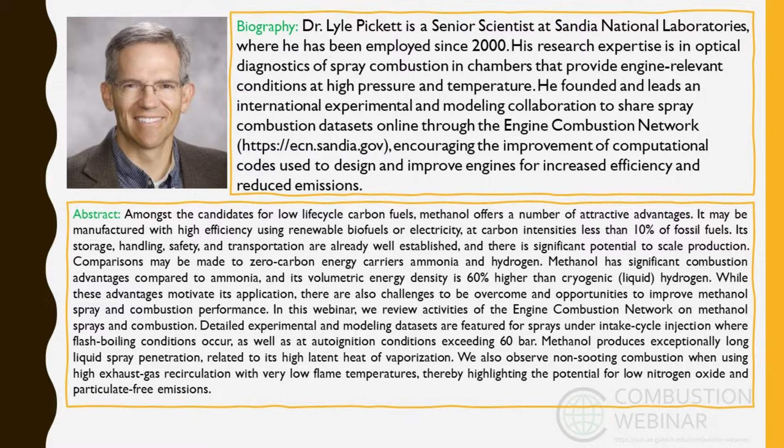Which I've entitled Renewable Methanol Spray Combustion. And while I'm the presenter for this research, I'm really drawing on the work of a large number of people. Many of these people have participated very actively in the Engine Combustion Network. You may be familiar with our workshop. We hold monthly web meetings and in-person workshops. And several of the people listed here have been major contributors and organizers on the topic of methanol spray combustion. So I'm going to be sharing some experimental and modeling research at Sandia, but also from a larger community.

Calling out some of these people by name, Rafael Clemente is from Friedrich Alexander University in Erlangen, Germany, and did a research stay at Sandia and collected much of the data that you'll be seeing today. Paul Lien is at TU Darmstadt, is involved in CFD modeling and was a co-organizer with Rafael, I call him Rafa, on this methanol spray combustion topic. And Frederik Wiesmann is also involved in modeling from TU Vienna, was a major organizer for the combustion and compression ignition topic on methanol spray combustion. And Julien Manin was the PI and lead for the collection of data on compression ignition of methanol, and then many other participants at Sandia.

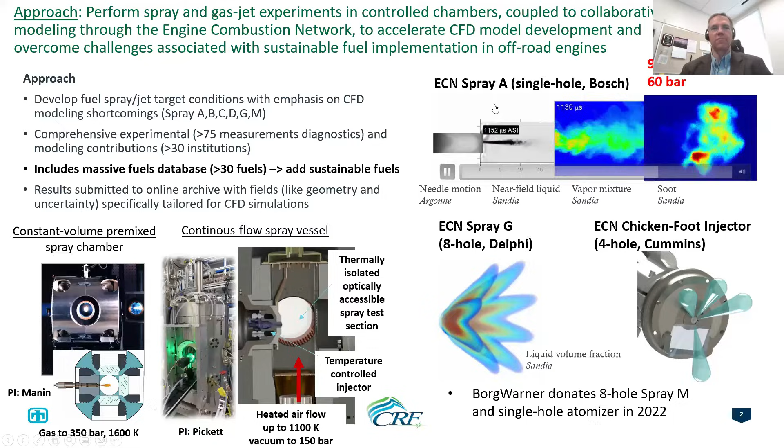And just speaking about the ECN and what I've described, what we're really trying to do is form a collaborative research group that can really benefit each other. And so we refer to ourselves as a peloton, as in cycling. And so the people that have gone on before and maybe have started some of this research, maybe have experimentally already investigated the topic, it really sets up a nice slipstream for others to follow, to join in quickly and to make an impact.

This can be experimentally or computationally. And as we met for our most recent workshop, which was held in September in Naples, Italy, this is the slide that we shared. And I want to thank Alessandro Montanaro at CNR STEMS for hosting us at this workshop. I'm listing myself and 2 other organizers from the ECN, Gilles Bruneaux and Raul Payri, who've joined in this effort.

And at this workshop, the Engine Combustion Network has changed, and we've chosen different topics for future research. All of these topics are focused on low life cycle carbon fuels. You can see the topic and then the leaders. So there is a very strong effort in hydrogen injection and combustion. There's methanol in the early direct injection application, and I mentioned those leads.

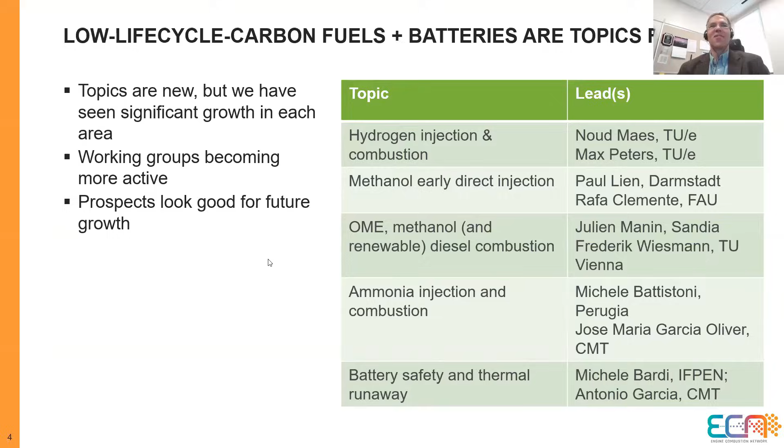And as we're in Naples, Italy, we could ask the question, well, how do these things fit together? Why are we doing this research together? And is there even an overlap? And many of you know that Naples, Italy is the birthplace of pizza. So we say there that yes, there is a reason that this activity can fit together like a pizza, where we're combining a perfect combination of ingredients, New World tomatoes with Old World cooked dough on a hot stone to create this kind of masterpiece.

And so we can go further with this analogy and say, all right, if you really want to start a debate with people with a lot of passion and opinion, you would raise the question, who makes the best pizza in the world? And in our research community, it seems like there are these topics, and I can make a very strong argument for research in each of these topics. I will make an argument about methanol research. But likewise, there's really strong reasons to look at hydrogen. There's strong reasons for batteries.

Their high conversion efficiency, the opportunity to power our electrical grid through renewables. Very, very strong reasons to look at these things. And there are pros and cons of each of those. So there's strong reasons to look at OME, DME, and renewable diesel as well. So speaking about the Engine Combustion Network, we view a lot of value in looking at all these things. And honestly, it's not clear to me that there is a clear winner. I think there's a strong reason to look at all these things together in some sort of combined pizza, if you will.

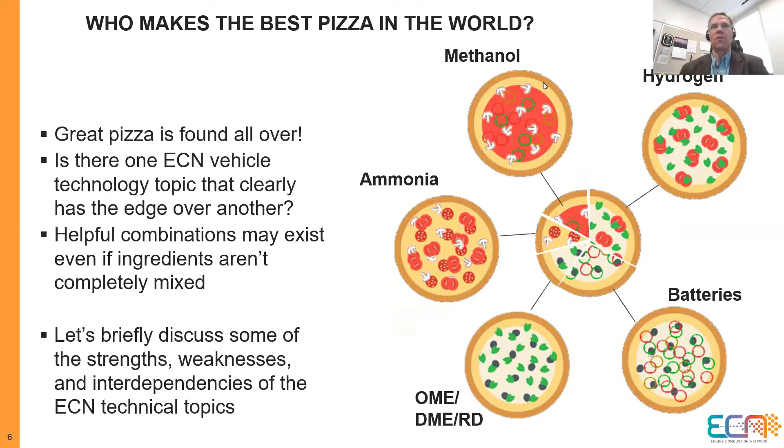So as I go into this, I think my view of the research motivations has changed because I think that many of the challenges are about production, making these fuels in high quantity, and it's not something that we can completely disconnect from how we plan to use it. So I'm just going to talk about those issues a little bit to motivate why methanol might be an interesting future. So one of the things to consider is the volumetric energy density.

And methanol is a carbon-containing fuel. So this graph is separating those fuels or batteries that do not contain carbon or do not emit carbon dioxide in the tailpipe. So it's quite interesting that even cryogenic hydrogen has a much lower energy density than does methanol, or than does any of the carbon-containing fuels. And of course, batteries are down here in terms of energy density, which is the significant challenge, especially for vehicles that are off-road or that are in remote places and so forth.

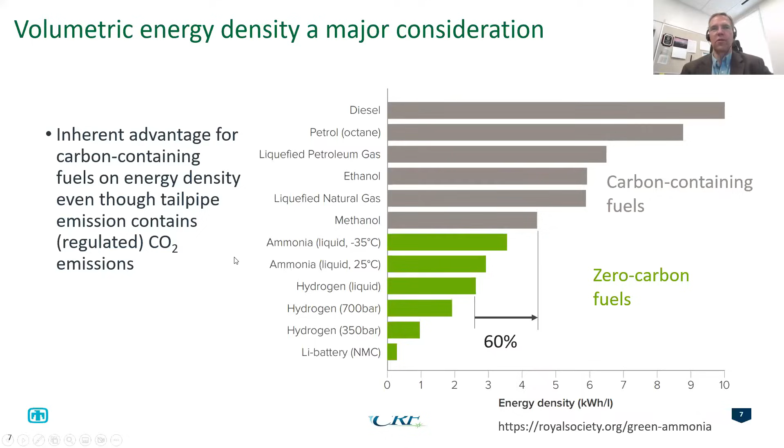So this is really a strong driver. I think we appreciate this and understand it, but stopping at a fuel that is very renewable on a life cycle basis, but that has high energy density is going to be a continual driver while this conversation goes on. And so I think it's important to consider an endpoint with respect to producing methanol and these other fuels: what is the potential in terms of efficiency, of course cost will matter, and in terms of things like land use and so forth. So green methanol production is enticing because it really can scale directly with our ability to produce renewable electricity.

And so I'm calling this slide favorable views on green methanol production because you will find different opinions in the literature. And so I'm listing the full sources here, but there are voices that say power to methanol efficiency can be 50 to 60%, even when using direct air capture for combining the hydrogen from electrolysis with the captured CO2. Even direct air capture, which is not a very efficient process, according to this study, could produce efficiencies that start to look pretty impressive.

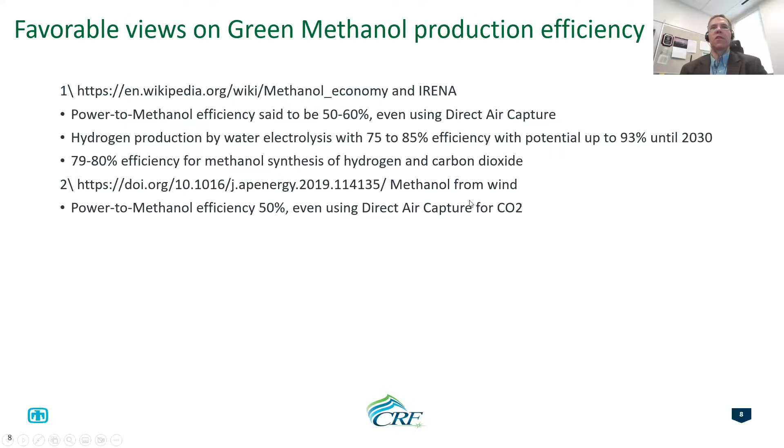Now, of course, we should compare that to other sources. So here's a different source saying power to methanol efficiencies of 50% with production coming from wind and also using direct air capture. Other sources say 50 to 55%. Also state that methanol to gasoline efficiency, that is, if you can form methanol with such high efficiencies, so let's say 50%, what about producing an even higher energy density fuel, so a gasoline, that this conversion efficiency can be upwards of 93%. So, this starts to look quite promising for producing what we need, a high energy density fuel.

But this is methanol, and it's got difficulties. It requires carbon dioxide in the process, a captured source of carbon dioxide, which is certainly a big challenge. So let's compare it to other viable alternatives like, oh, and before I go on, I could mention that these efficiencies may increase if we could use biofuel processes with wise land and water use as well.

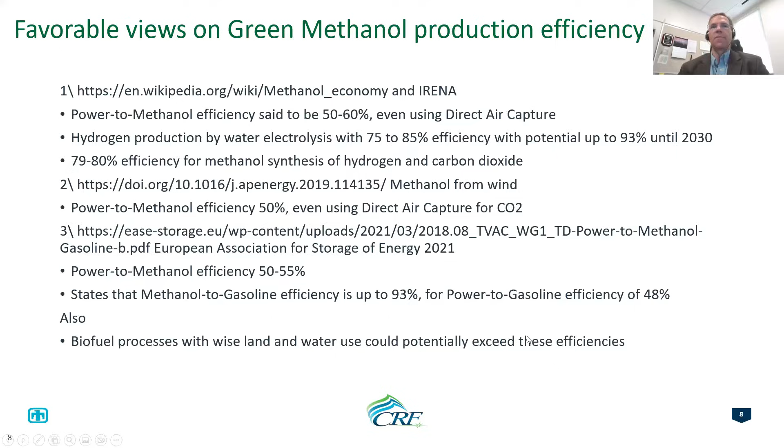But let's compare this to ammonia, since this is a carbon-free fluid, and there are projections that our efficiency in production from power to ammonia may be very high. 74%. These are not processes that are fully developed today, but I'm seeing numbers that look very impressive. And I think this is a really important thing to consider, that if ammonia can be produced with higher efficiency than methanol, for example, that in the end, it may be something that would take a greater hold.

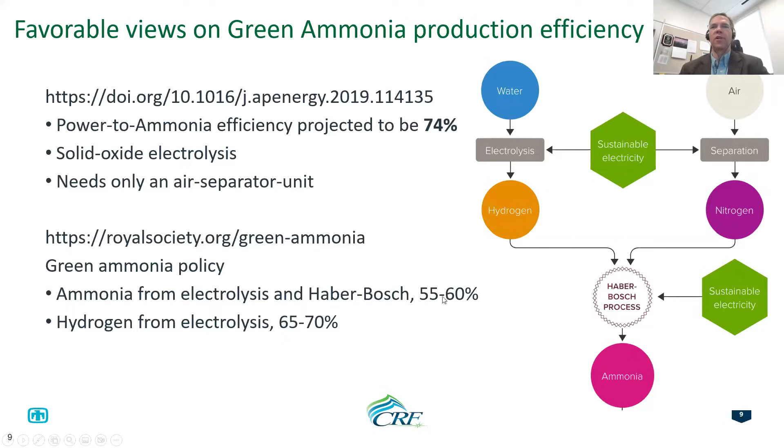Now, there are other opinions about this. So 74% is maybe a future target, but other sources will say ammonia production to 60%, again, citing the assumption for how efficient the hydrogen production is. And this really, I think, illustrates the trade-offs then.

So if we acknowledge that ammonia could be produced with higher efficiency, but then we consider how it's used, I'm going to rely on an analysis that was performed by Eshan Singh, who was a postdoctorate here at Sandia, and he considers separately, it's his own analysis drawing from other resources. He considers the prospects of producing these liquid fuels from renewables through electrolysis with a perhaps 70% efficiency, and then to produce 100 units of pure electricity down to this 70%. Now, through his analysis, he shows that you would have a higher conversion efficiency to produce ammonia than methanol, which again makes sense because you need to combine the hydrogen directly with CO2.

But when considering how that methanol is used to produce power, we know that there are advantages for methanol compared to ammonia in terms of combustion. So the most striking thing would be if we look at the flame speeds for ammonia compared to methanol, that it's a factor of 10 lower for ammonia compared to methanol. And so there's high octane ratings for methanol. So there's a strong belief, and in practice, what we know thus far is that the efficiency to use methanol could be improved.

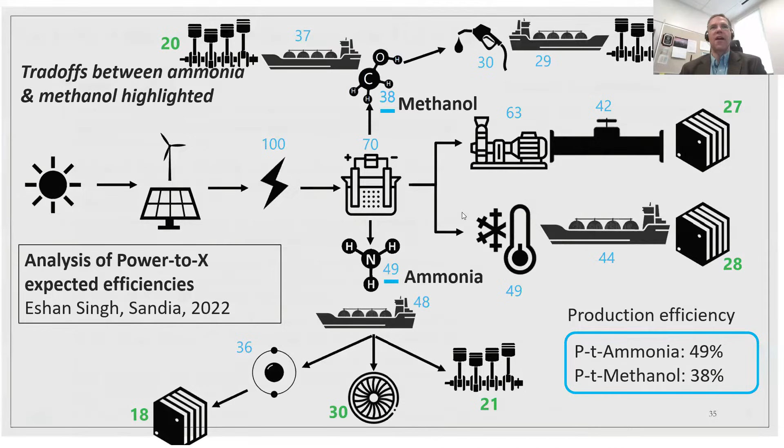So with that, I've made the case and given some trade-offs as to why methanol should be considered. And so let's go into this just in a little bit more detail. Its life cycle carbon intensity can be made very low. So if we're using renewable energy, if we're using biomass processes, if we're going power to methanol, we can definitely have carbon intensities that are less than 10% of that of regular fossil fuels.

Another big advantage for methanol is that its storage, its handling, its safety is established. You'll find it all over. It's a major commodity for the chemical industry, and there is really a precedent for how to use it and store it, which is really not the case for other fuels that may have been chosen. One of those is OME.

We don't have an infrastructure to move and transport OME, and that's a barrier for making a lot of it. There are large commitments, especially for marine applications. Maersk has ordered 1 million tons of methanol from a power to methanol, a green methanol process, to power its

19 vessels. And methanol has already been implemented in heavy duty applications that involve direct injection during intake or compression. Usually this is done with a dual fuel situation. So you charge the engine with methanol and then use, let's say, a renewable diesel pilot to begin the combustion, but spark ignition has also been used. It has a high flame speed.

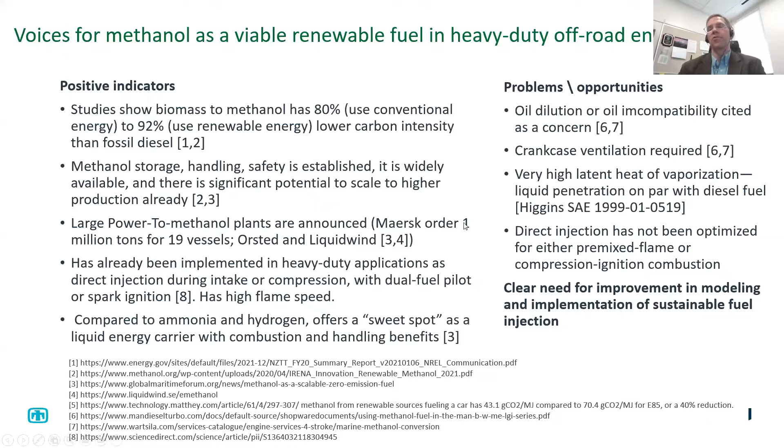Okay, and so with that lengthy introduction, I am going to give a review of some of the things that we have observed about methanol spray combustion at ECN 9. And I will be talking about two different cases. I will be referring to direct injection fueling during the intake cycle using Spray M, which is an 8-hole nozzle.

Experimentally, we've been able to do some advanced measurements to quantify the liquid distribution. We've been able to study even impingement situations where it forms films, and surface temperatures. So with apologies for talking about this at a combustion webinar, it's really the spray processes. Of course, there's going to be a direct connection to the combustion process if you have a film as opposed to a vaporized mixture in cylinder. But we'll be focusing a lot on those spray processes.

And then part 2 is talking about methanol sprays with compression ignition. Here we've used one of the ECN injectors, Spray D, which has a pretty large nozzle size. We're injecting at conditions where we would experience autoignition. We're comparing methanol to other renewable low carbon fuels like OME 3-5 and dodecane, and applying some advanced

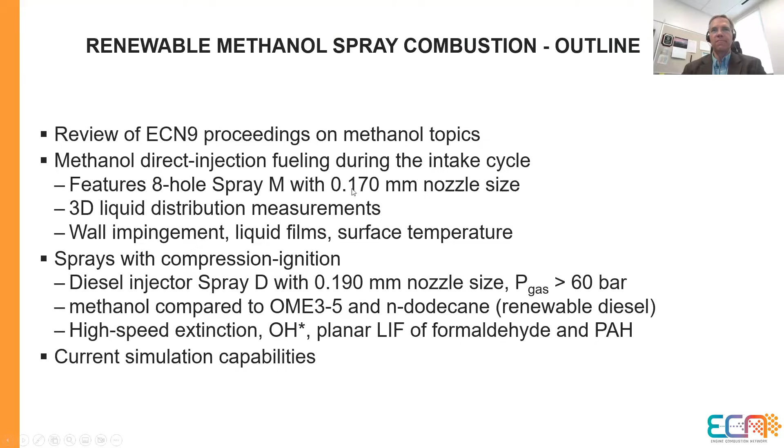laser diagnostics. I'm going to give a brief overview of some of the simulation capabilities that have been demonstrated at our workshops. And I want to give full acknowledgement to the many people working on this topic, both on the experimental side and the simulation side.

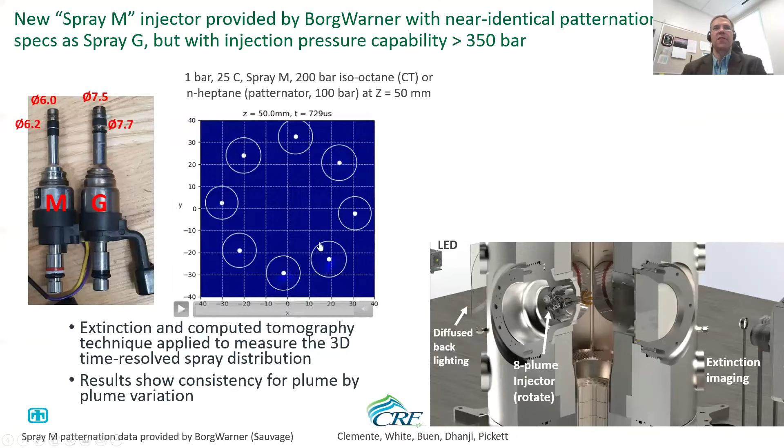So the diagnostic that I'm going to show is one where we apply computed tomography of the spray. This is accomplished by mounting the fuel injector in a controlled chamber. We can change the pressure and temperature of the gases. We can change the pressure and temperature of the fuel injector, and we can rotate the fuel injector. We collect quantitative extinction imaging, high speed, of the spray.

And then by rotating the fuel injector, it's possible to essentially do a CAT scan of the spray to render what the spray is doing in 3 dimensions. So here we're showing the 3-dimensional liquid volume fraction distribution. And with this injector, we can compare our result to that of a standard patternator measurement, which would be performed, say, downstream at 50 millimeters away from the injector.

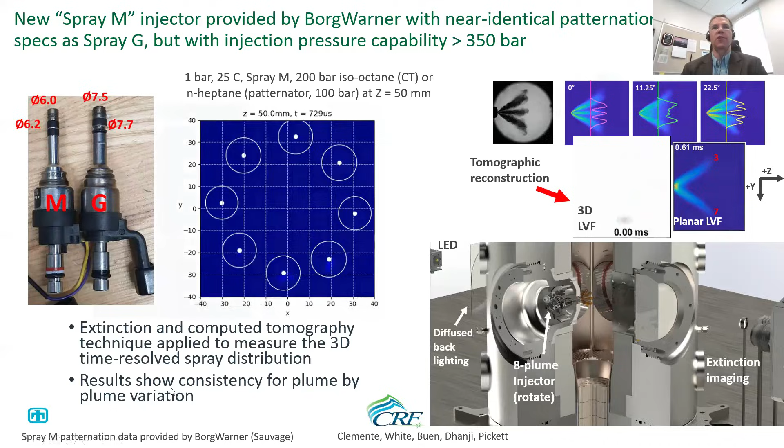And our technique through computed tomography shows very good agreement. We see the spray, each of the plumes reaching the same target position, and so forth for this fuel injector. And so to gain an understanding of methanol performance, we can compare that. Again, we can build upon the data set and understanding that exists.

One of those data sets has been developed for PACE-20, which is a 9-component gasoline surrogate. And now, as we go downstream into these different planes, first I will say that we are doing this 3-dimensional computed tomography.

We can choose to look at the data at different orientations. This is the ZY plane, and you're seeing the plumes on the top and the bottom, and we're injecting into a condition at 6 bar and 300 C.

So now, instead of just looking at one of those planes or one of those plumes, we can make a more quantitative measurement by probing through the axis of the plume. So on the bottom here is radial distance from the center line of the injector axis, and we're comparing the methanol liquid volume distribution compared to that of PACE 20.

Immediate observation is that there's a lot more liquid for methanol. It's easily 5 times higher. It shows similar characteristics as the regular gasoline, but much, much higher liquid, more persistence of liquid after the end of injection. And so this raises the question and challenge, how do you avoid liquid wetting on surfaces with methanol? And can CFD predict this?

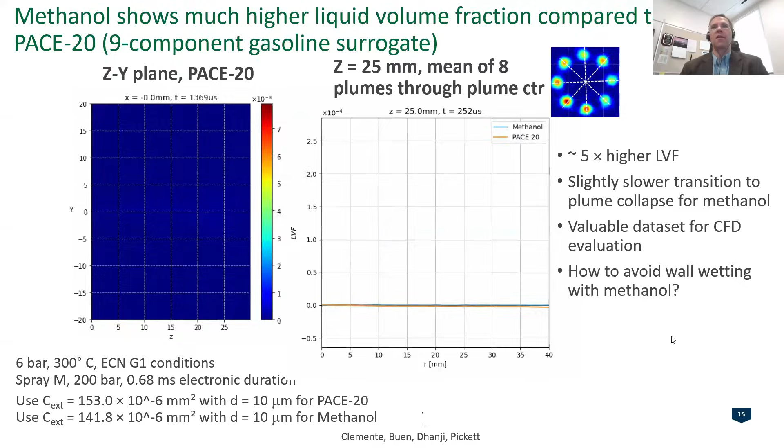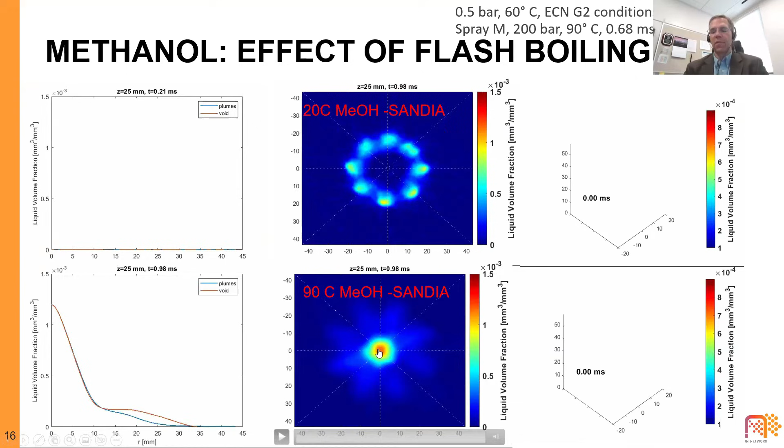And compounded with this is the dynamic that was shown that the plumes are collecting together. Through the fluid mechanics, the plumes are not separate. They do not maintain the large degree of mixing, but will collapse into one very fuel-rich core, which also inhibits the vaporization. So these are all really strong issues to consider for the mixing of methanol.

Now, as an outcome of this high liquid penetration, it's probable that films will be formed on surfaces. And so we have tried to investigate this outcome through a series of measurements. We've created a wall at a fixed position away from the injector. And this wall is one where we can control the temperature through internal circulation of the wall. And there's an optical section on one section of the wall to study films and film thickness.

And there's also a probe to study surface temperature. Very thin, fast response thermocouples mounted in this probe, all controlled to the same temperature. And the idea is that one plume would strike, it's an 8-plume injector, one plume would strike the surface temperature probe, the other plume would strike this optical section, and we could perform these measurements simultaneously.

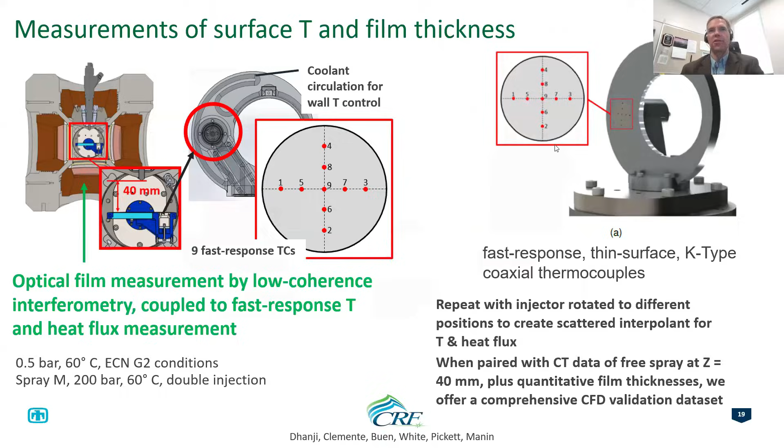And then the other innovation is that we have rotated the fuel injector, as has been done for the computed tomography experiment, such that we get film and surface temperature measurements at different impact positions for the fuel injector. And so I'd like to share some of those results here, where the fuel injector temperature, the gas temperature, and the wall temperature have all been controlled to the designated temperature shown.

So at lower temperatures, what happens with the double injection event is that there is cooling at the impact position, and that cooling substantially increases when the temperature of the fuel goes up. There's more evaporation cooling. And when we go to the 90C condition, what's interesting is that we're seeing the outcome of the plume movement going towards the center.

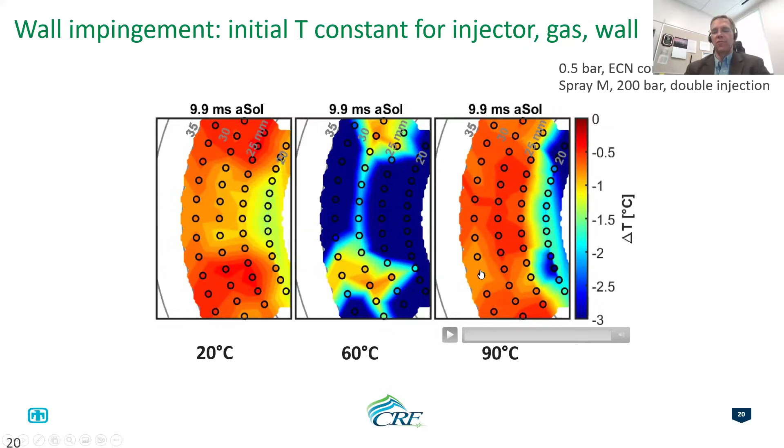And so the place of highest cooling is actually in a different spot for each of these temperature conditions. And it's really more towards the center, and it doesn't reach this sort of fixed probe position as shown. So these are all really valuable data sets that can be used for evaluation of CFD.

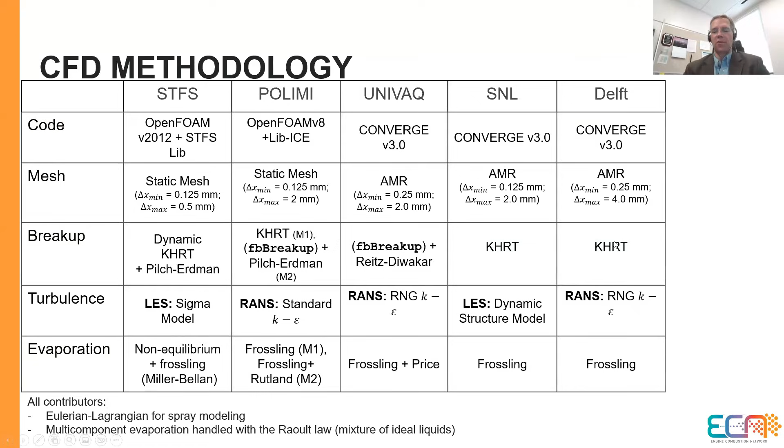And I want to just briefly give some of these CFD results that have been shown at ECN 9. These were different groups that submitted those results. I don't really have time to go into the details of what they're doing. But one of the challenging conditions is this flash boiling condition, where the fuel is heated to 90C, and we observe this collapse together of all the plumes. We can ask, how does CFD do in predicting this plume collapse?

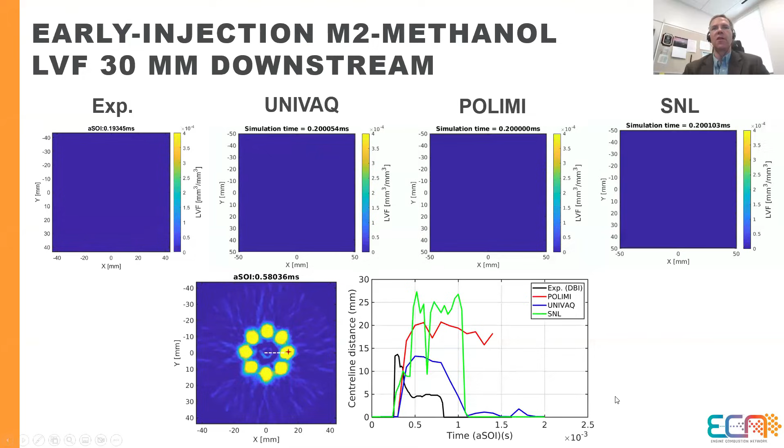And when we identify the plume position relative to the center line, and just look at the data quickly, we find that the group that has the best prediction is University of L'Aquila. They are able to see more of the plume collapse than the other CFD simulations, showing the videos of this process where we go through the plume center.

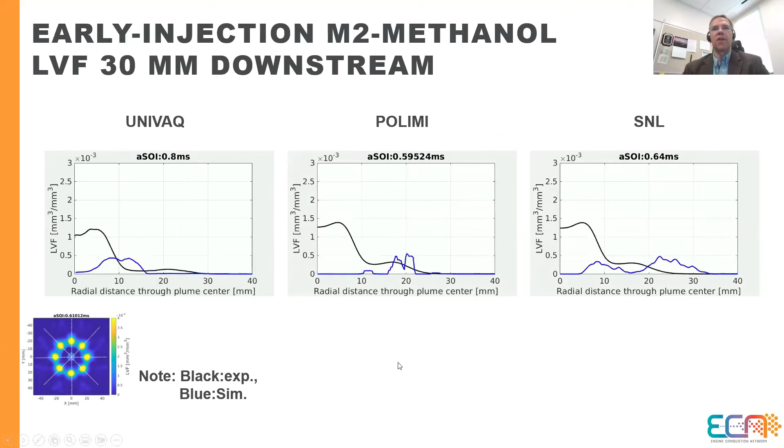We find that, again, with the method that University of L'Aquila is doing, there is more of a tracking and a motion of this liquid volume fraction compared to the other groups. And so this raises the question, what exactly are they doing? They have implemented some very clever breakup models for the spray that includes detailed analysis of bubbles forming in a flash boiling scenario, how those bubbles would form and spread and break up the spray. And this shows it's a promising direction. It's a challenging problem, but the technique is reflecting more of the physics.

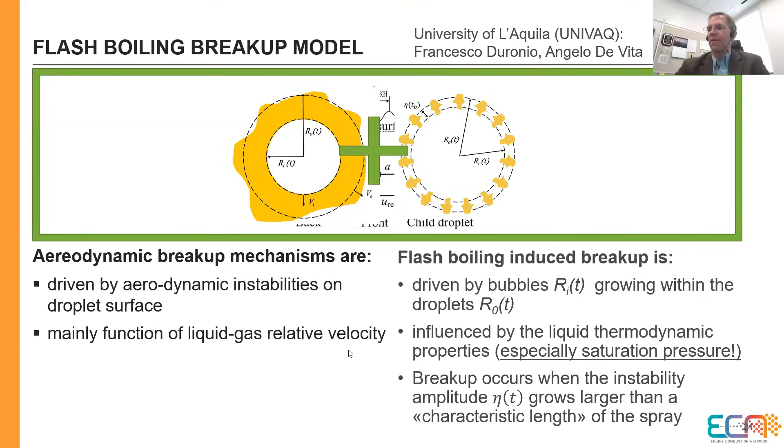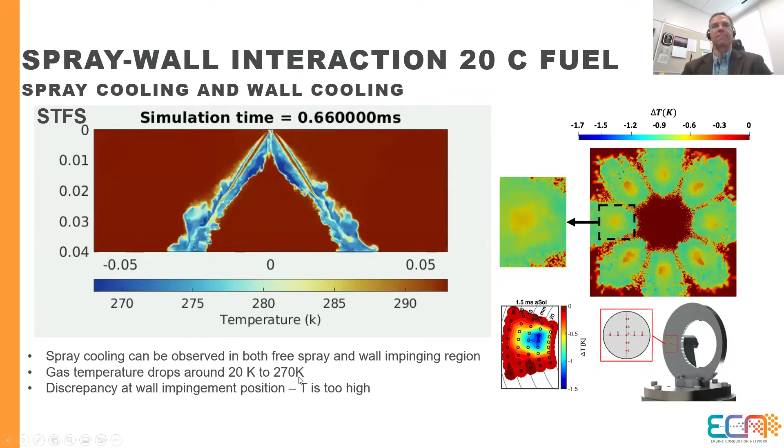And now, in order to give some effort in this presentation towards combustion, I'd like to then focus on some outcomes for methanol combustion. And these are conditions at very high pressures. So we're injecting into pressures that are above 60 bar at elevated temperatures. And we have a collection of both experimental and simulation results.

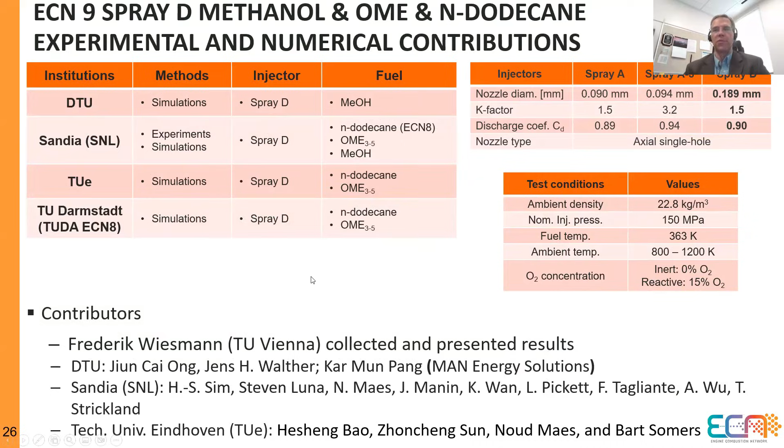Now, methanol has a very low cetane number, a very high octane number. And so it experiences very long ignition delays. It's possible to ignite the fuel spray at these conditions by achieving very high temperatures. Really, the temperature needs to be above 1100 Kelvin. And so this will require very high temperature gases created with a pilot, created with high compression ratio, created with high preheating in order to achieve ignition. So we can compare that to OME 3-5 versus dodecane.

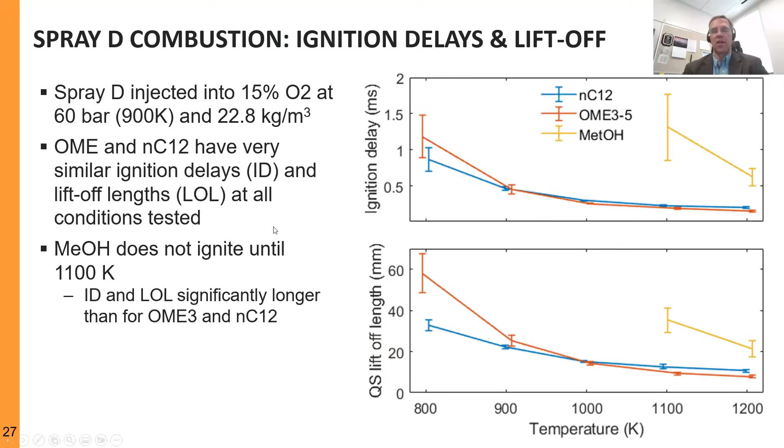We have observed soot with highly oxygenated fuels, but honestly, this is the first time that we have observed completely zero soot, despite the fact that we're operating at very high temperatures, despite the fact that there is very rich combustion, and we're using heavy EGR. There is no soot formed for methanol or OME 3-5. We think that there's reasons for this related to the fuel chemical structure and such high oxygen weight percents. We observe no soot and no soot trade-off when operating with high EGR to simultaneously reduce flame temperature.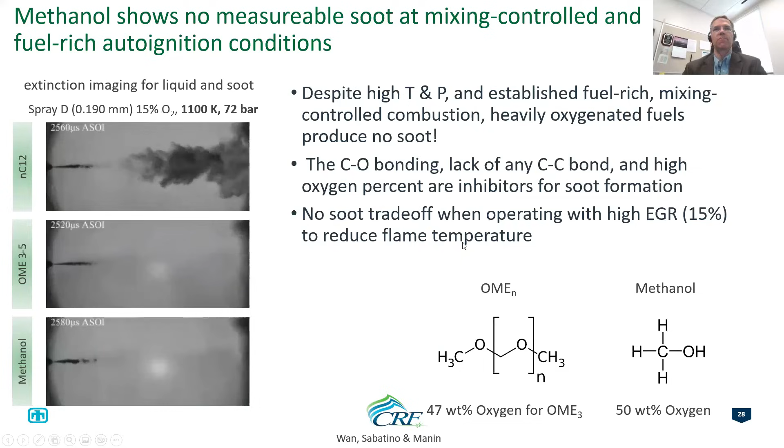We've performed a series of detailed measurements on the cool flame distribution, comparing OME, dodecane, and methanol. And here we are at an elevated temperature as necessary for methanol. We do find cool flame formaldehyde upstream of the location of high temperature reaction in all cases.

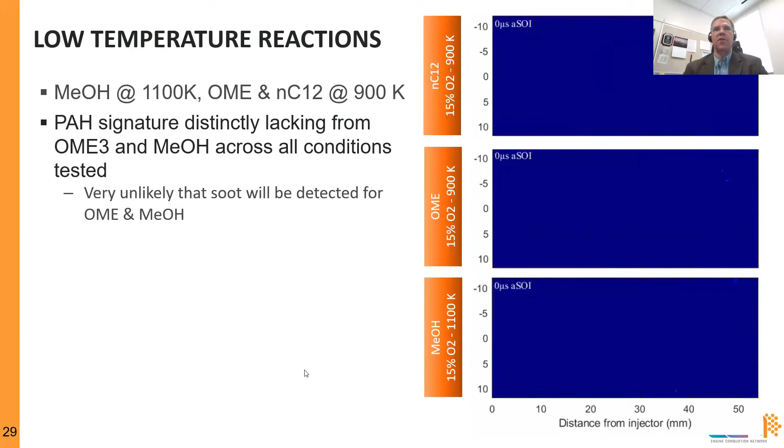We can also compare measured OH chemiluminescence for dodecane, OME, which have very similar ignition locations and liftoff behaviors, whereas methanol, even at 1100 Kelvin, is producing ignition and liftoff positions that are much farther downstream. A lot more mixing is occurring for methanol spray compared to these other injections.

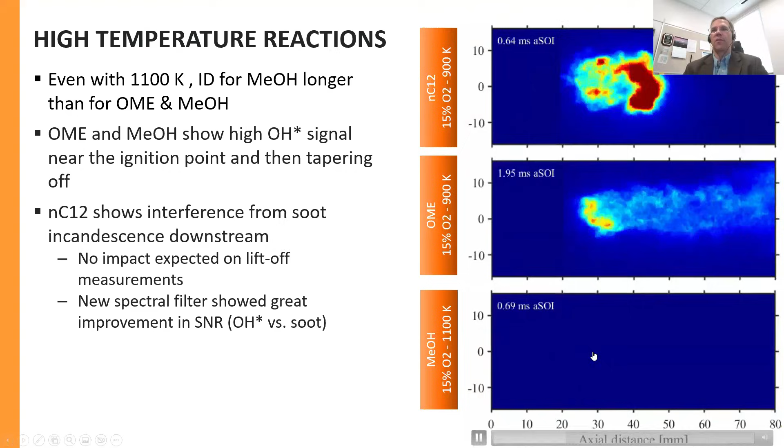And we thought it would be interesting to combine the diagnostics where we have planar laser-induced fluorescence of formaldehyde that's overlaid with OH chemiluminescence. So you can see that there's a lot more formaldehyde that is forming upstream of the high temperature reaction zone for these more reactive fuels, but with methanol, there's more of an overlap in where the formaldehyde is forming and the high temperature flame takes over. So again, these are really some opportunities for a detailed model evaluation.

Now, liquid penetration at these conditions, once again, we see long liquid penetration for methanol compared to the other fuels. And so we need to consider that the highly evaporative methanol, along with its longer liquid, is going to tend to penetrate farther and could affect the flame structure downstream.

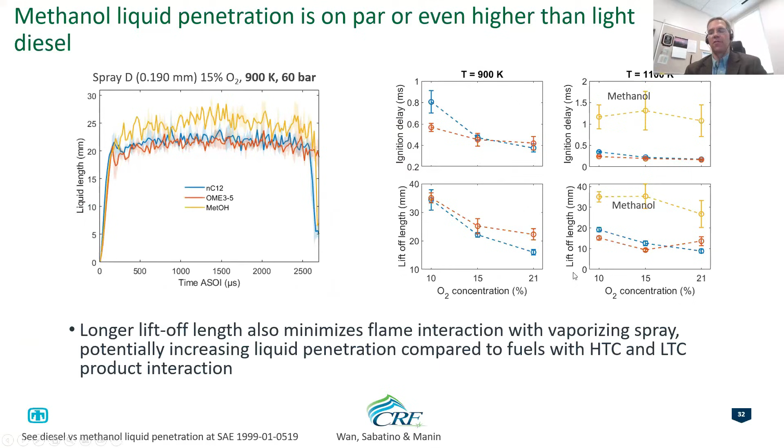And with apologies, my computer's a little bit slow in responding.

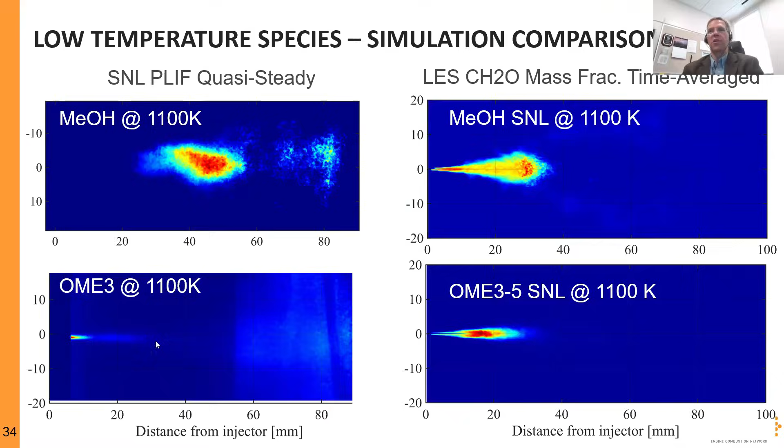Okay, here it goes. We can also look at the predictions at higher temperatures with methanol and with OME3. You will find some discrepancies. So in this case, the consumption of formaldehyde is a little bit earlier, more advanced for the simulation at Sandia. And that's true with the OME 3 to 5. We have a prediction of formaldehyde that's a little bit longer than what we see experimentally. And so these are again things to work on for the future.

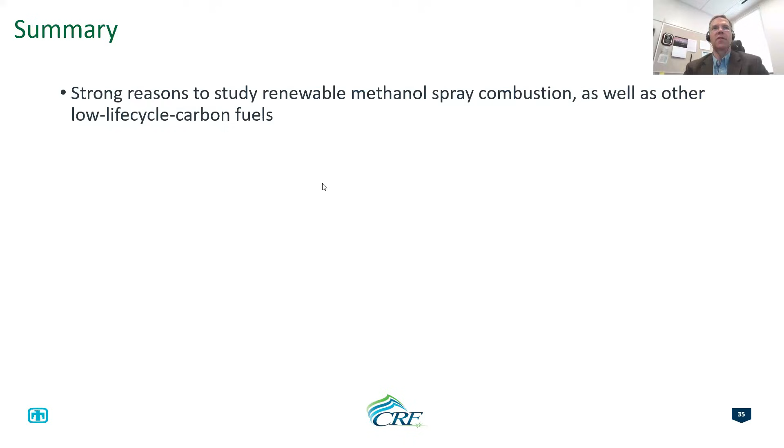So in summary, we've embarked on studies of renewable methanol spray combustion, as well as other low life cycle carbon fuels. All this is happening through the Engine Combustion Network. And there are specific things that are a challenge for CFD. We can identify the flash boiling behavior, the plume interaction and collapse, the extensive liquid penetration and film formation and surface heat transfer that's observed. And this is just sort of a general result independent of reaction and combustion.

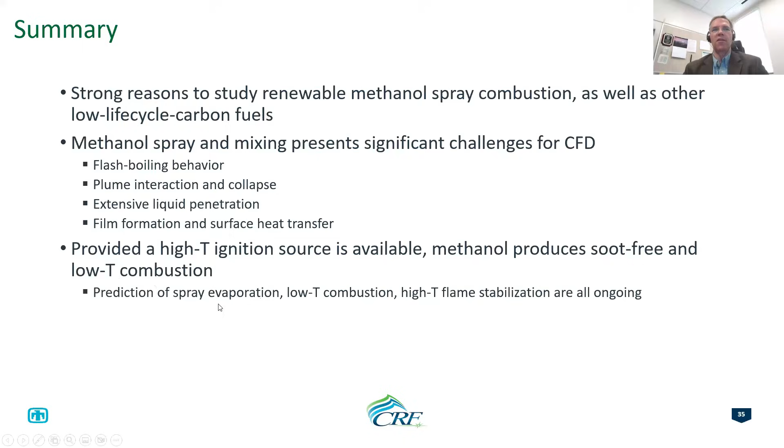Under combustion and compression ignition conditions, we find that methanol burns well, but it does require a very high temperature ignition source. And it produces soot-free and low temperature combustion, which again is a great opportunity to capitalize on both the soot-free as well as low flame temperatures where presumably nitrogen oxide formation would be low. So the prediction of these things in detail, the spray evaporation process, the low temperature combustion process, the high temperature flame stabilization, all these things are ongoing.

And I could just say, please join. If you'd like to join in the ECN Peloton in simulating these conditions, in performing experiments at these conditions, you're more than welcome to do so and could refer you to the website.